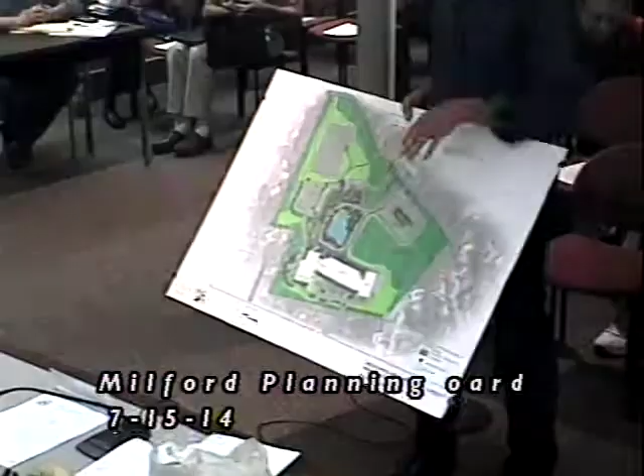In fact, this might be easier to see. This is my landscaping plan, which is very colorful. The school is located down here at the southern end of the site.

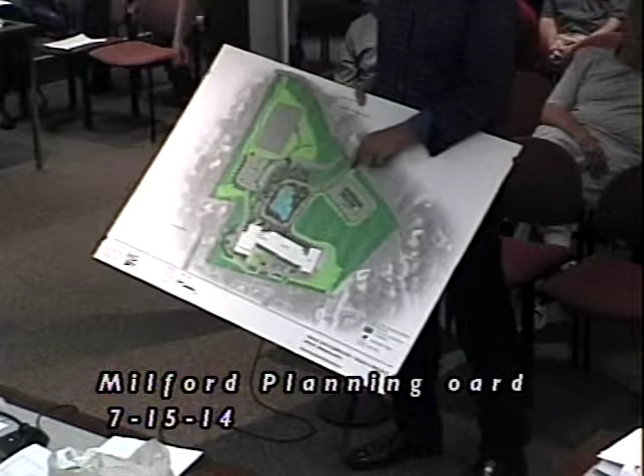North Vine Street runs along the north side. The proposal is to have two entrances, one for parents and service vehicles, a second for bus and accessible parking and staff, in this location. So that's for parents and buses.

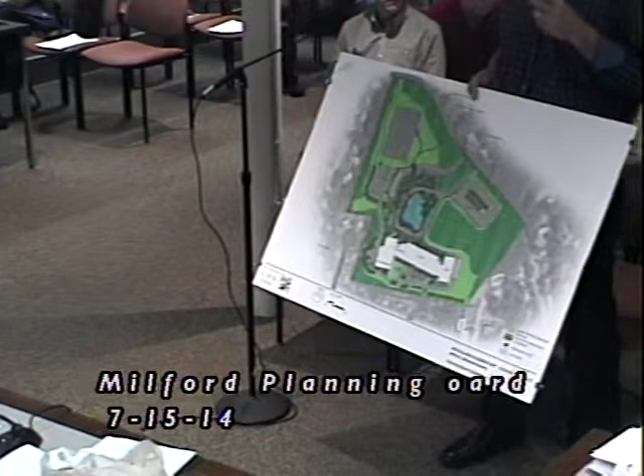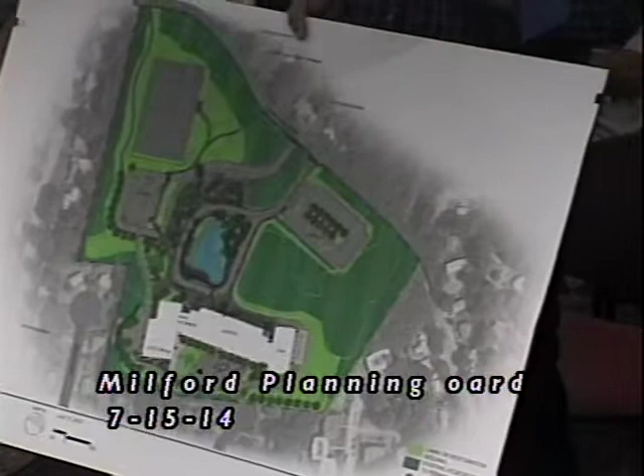The parents loop is one way in, as per recent discussion with the town departments, going to a two-lane configuration after this initial island. The two-lane configuration is sized to accommodate up to 88 vehicles for queuing, so queuing doesn't back up onto North Vine Street. That plus the 53 parking spaces within the parking area here is enough to accommodate all of the pickup and drop off vehicles.

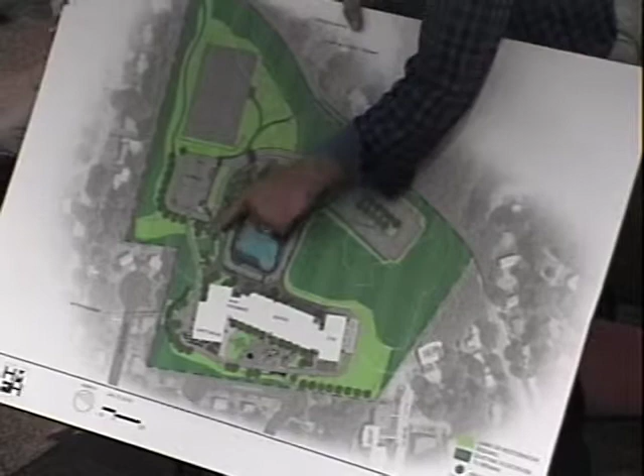Pickup and drop off happens along these three sides of this area, around the outside of the parking area. Students who get out of a vehicle will walk along the sidewalk and then into the front entrance, into the main entrance of the school. Anybody who needs to park can park here, walk across this crosswalk, and then on into the school.

If you're arriving in a bus, the route is along through here. We have 12 buses projected at the school, but we have room for 13, so there's some flexibility in the arrangement of the parking for the buses, which is great news.

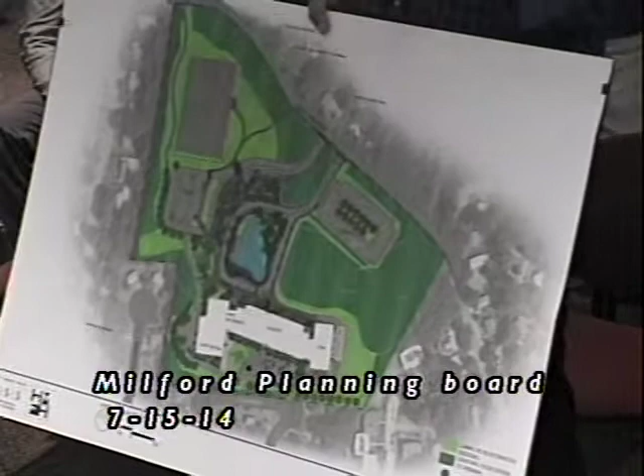In addition to those 13 spaces, we have 2 van accessible spaces along the curbside, so the special needs van can stop and let students on or off at that location. That's directly in front of the school with a flush curb and bollards to protect from cars driving up onto the sidewalk.

Does that make sense? Okay, thank you. The size of the bus loop is determined primarily by the stormwater pond, which exists on the site in the middle here. Nate's going to talk later about how that's being sized to accommodate all the stormwater drainage on the site, so I'm not going to go into that.

In addition, at the bus loop are 7 parking spaces for accessible use. So if you have business at the school and need to park longer term than the short term pickup and drop off, we have 7 parallel parking spaces there, some with right side aisles and some with the required left side aisles. Does that make sense? Okay.

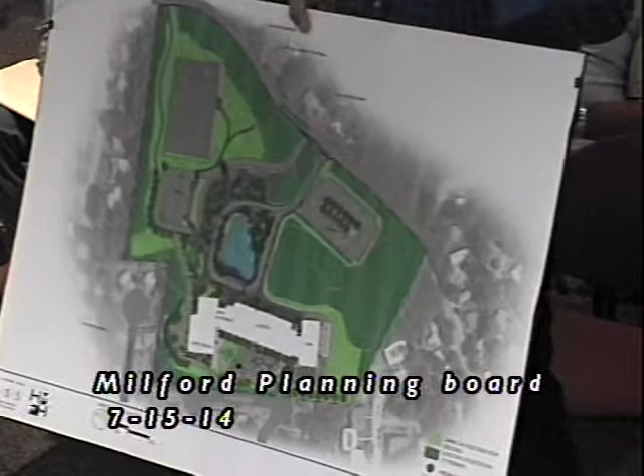133 staff parking spaces are over here on the northeast side of the site. A sign at the entrance will indicate accessible, staff, and bus use only for this loop.

Also off of this loop is the fire access that runs around the entire school and then back out here. That will be a mountable curb at that location. We've run all the auto turn calculations and the Milford trucks can get through.

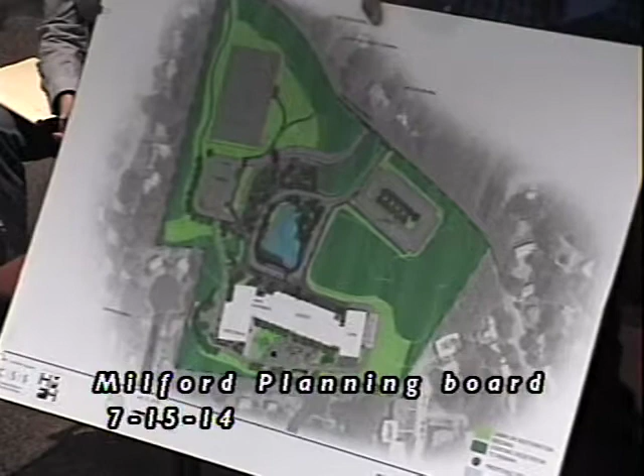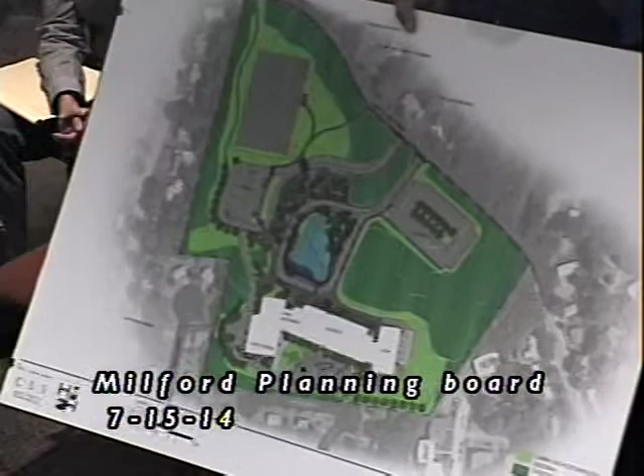Service for the school on a daily basis is through the service entrance here, off of the parent pickup and drop off loop, that goes to the west side by the cafetorium. That's where garbage and the daily deliveries happen. Exiting for the service vehicles would be through a hammerhead arrangement and then back out along that way.

The pedestrian access from North Vine Street has basically 3 access ways. A new path runs from the northwest corner. An existing path is open here today, and we're just extending it through this field, then through a raised crossing across the parent pickup and drop-off route, and down to the school. A third access is along the existing sidewalk from the east that runs south past the staff lot to the school.

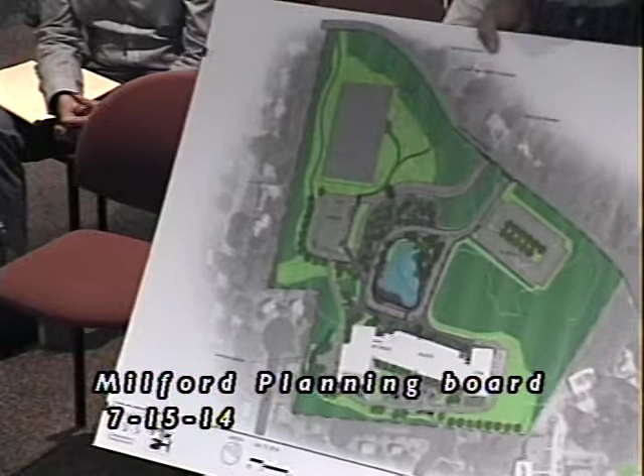This big field up here in the northwest corner is a synthetic soccer field sized for soccer play. We're looking at all of the high school rules, although this is primarily for the school.

It's accessed accessibly from a walk here, and there are 3 accessible parking spaces as close as possible to the soccer field - 2 van accessible and 1 traditional accessible parking space. And this is a traditional crosswalk with curb ramps.

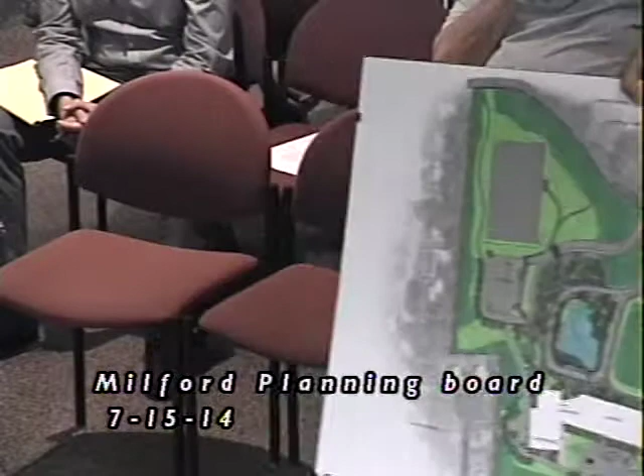There's a 100-foot offset line for school uses within a residential district, and we obey that 100%. The only things that transgress it are walkways and driveways, and then the fire lane as well - required uses.

The last thing to talk about is all the green on this plan. The dark green is existing forest, lighter green is planted space. We are proposing planting quite a few trees. We have the required amount of trees for parking. In general, we're keeping them out of spaces where snow is to be pushed, so in the center aisle here, and then around the perimeter out here.

We basically have 22 trees shown in those 2 locations, and we need 20, so we're right on as far as the tree count. We're trying to preserve a bunch of existing trees. When you drive into the school, there's the circle - we're trying to preserve some of those trees in that circle because they're pretty great trees, and we can do it. It also happens to help some of our wetland requirements.

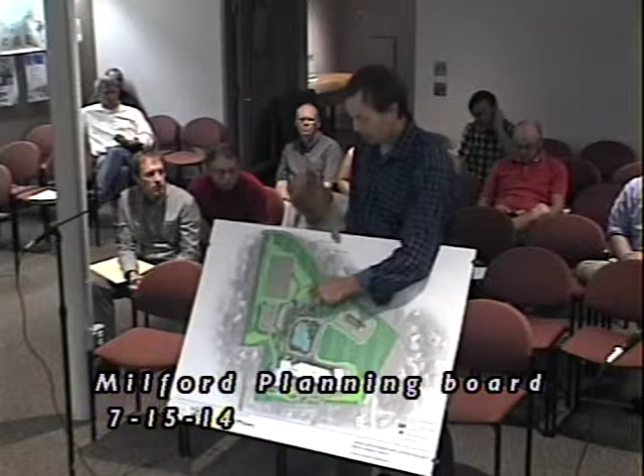The last thing, before I let Nate stand up, is we have a parking lot here that we're calling our bus parking, and that's included as an add alternate. So if the town wants to, in the future, build a parking lot in that space, then they can. Any questions?

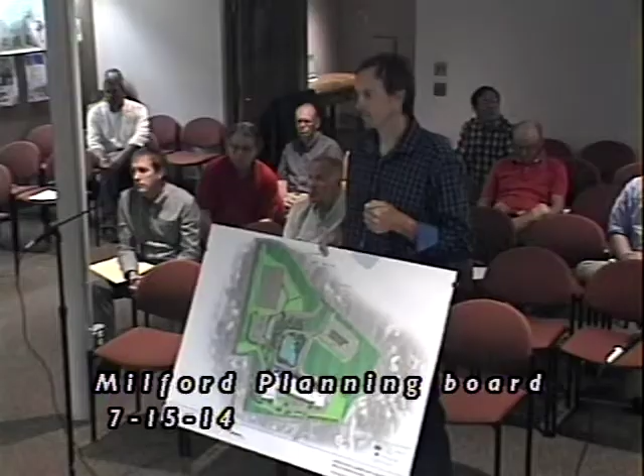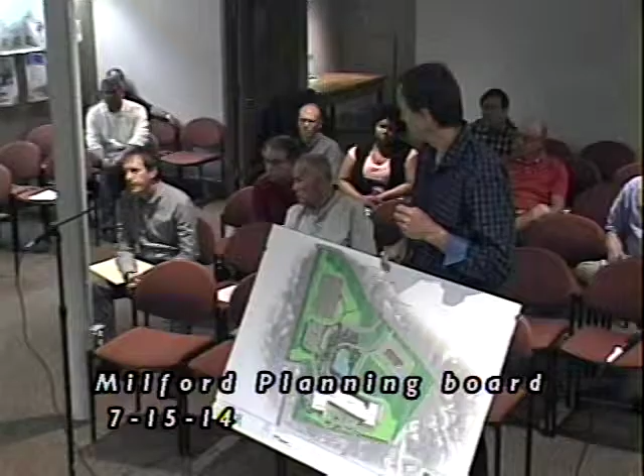Pat, go ahead. No, go ahead - I got a couple questions. In the existing soccer field, where we're going to build a school right now - is there not a rest area, restrooms, and a concession stand? There's a concession stand. Matt, do you know if there are restrooms in it? Yes, it has a toilet. So we have no plans on building them - we have not been asked by the building committee to include concessions.

I mean, it just seems if you had them there, they're necessary. Again, it's going to be a field that's going to be used quite a bit in the school, so it's just something I would think of, but again, it's your committee.

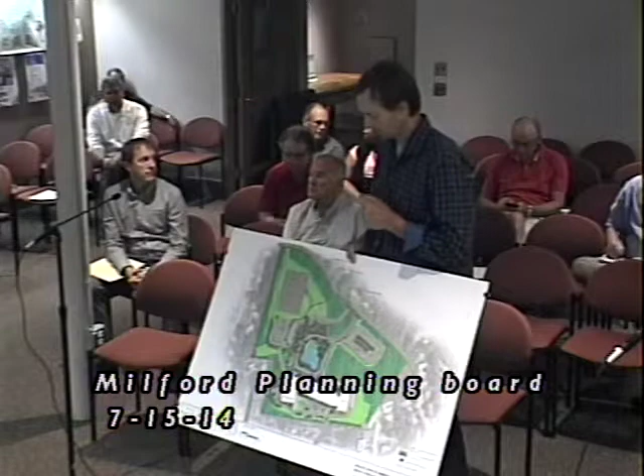The trees along there, down further, right there. Are those new trees? Yes, the dark green are new trees.

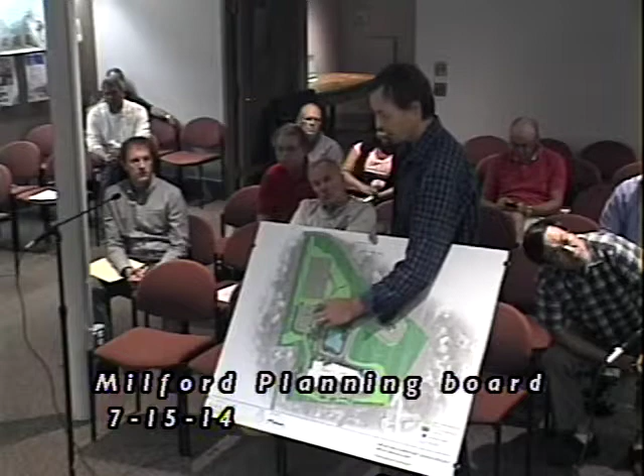Why are they planted so close to the roadway? They should be pushed away to make room for the snow plows to push the snow. What you're doing there is choking the snowplow operators. Let me explain the snowplow operator's position, because we've been working closely with him. He is talking about using the exterior drive to enter this space and plow to the north. That's why there are no trees between the soccer field and the parking lot.

So his thinking is to plow everything out this way. There's approximately 25, or maybe 20 feet — he can't go in that direction anyways because he's got the sidewalk there. The other side doesn't have an active sidewalk, so we can push it north, right over the sidewalk, but we've been very careful to avoid putting any trees in harm's way.

I think Scott had comments on that. Yeah, I did see the comments that Scott had.

Okay, that's all I got right now. Lena? No, I'll wait till everybody else has a chance to speak. Okay, Joe? No, I didn't have anything, I was just looking at Scott's comments. Did you address all of Scott's comments as part of these? Yes, I think so.

Go ahead, where are you located in the handicap parking? There are 7 spaces — 4 here and 3 here — associated with the bus lot, and then 3 over here in the parent pickup and drop off.

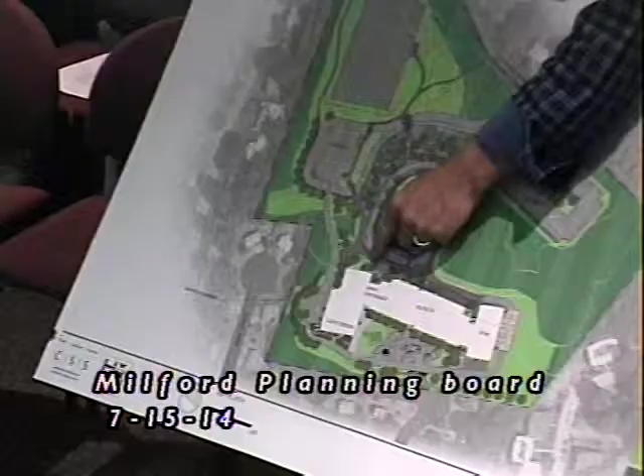Okay, because I got confused — at one point I thought you said that was for short-term parking, but it is handicap, correct? The short-term spaces are right here, and we're not counting those as spaces. That's just temporary pickup and drop off.

Okay, but they are accessible, slightly confusing for a second — in the beginning you said you have signage that restricts it, saying buses and staff, if you will. Buses, staff, and accessible use, which would be handicap, correct? Yes.

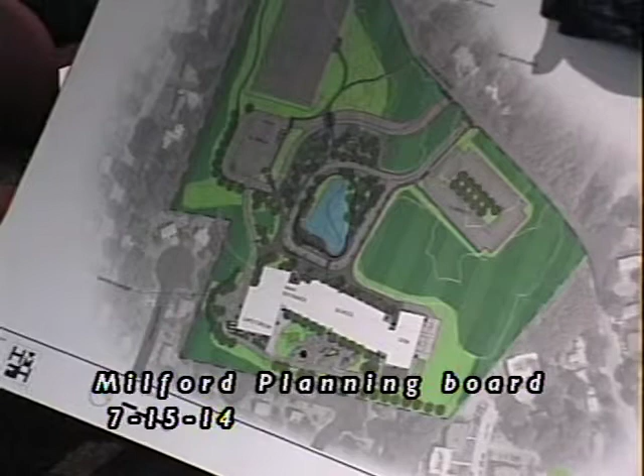If you have 7 and then 3 more, that's 10 — what's the site required to have? 6, I believe. Okay, so why would you need more temporary spots? I'm just confused why you'd need temporary spots.

There was a request to have van spaces for that — when you'd say accessible vans, are we talking about school vans? School vans, okay. So that has nothing to do with — let's not confuse the issue by calling it something other than what it is — it's accessible use, which is going to be part of a school van or school bus.

You let it seem that there's also going to be some sort of permitted short-term parking there, which is not what you're saying. That's right, I'm not saying that. I just wanted to clarify that was all — that was one of my questions. I thought something changed, but okay.

Who's next then? I'm good. You're good?

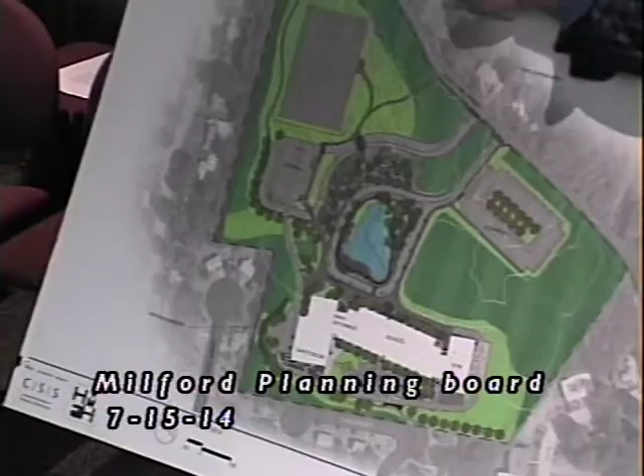Can I ask you questions? Yes. Well, I don't know — speak to the chairman, please. All right, not yet.

Good evening, everyone. I'm Nathan Ketchell, with Garcia, Gluskin, D'Souza, the civil engineers on the project. I'm going to give you a brief overview of the utilities involved with the site.

Obviously, the biggest one is the storm drainage on the site. The existing site does have a series of deep sump catch basins, which are directed to an underground drainage network, then piped to the existing detention pond, just southeast of the existing school building. In addition, there's a swale that runs behind the existing school around the parking lot and then also into that pond.

Under the proposed conditions, we're going to be utilizing a series of deep sump catch basins, followed by an underground piped drainage network, which will be sent to a hydrodynamic stormwater separator for total suspended solids treatment of the runoff. The runoff will then discharge to an enlarged detention pond located at the location of the existing one, with a piped overflow that will run to the east around the new building and then connect to the existing municipal drainage system, as the existing pond had done.

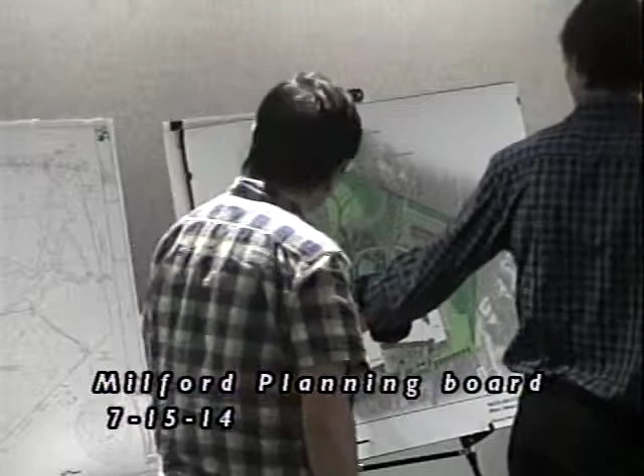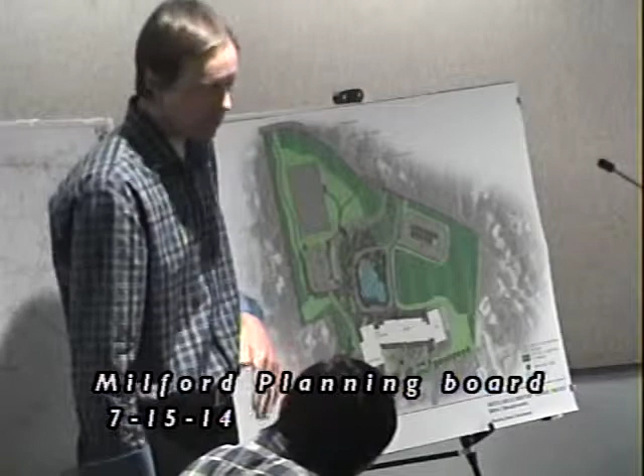Right, that's a good question. This did change subsequent to our last presentation because there's a wetland here, and in order to avoid damaging this wetland, we were able to relocate that roadway to just to the west. So that avoids about 2,300 square feet of wetland replication that we're going to avoid.

So it's a big deal. It's a big deal for my house, because this is my house here. Yes, so that's why you don't have to cut up many trees. I can also explain something about that.

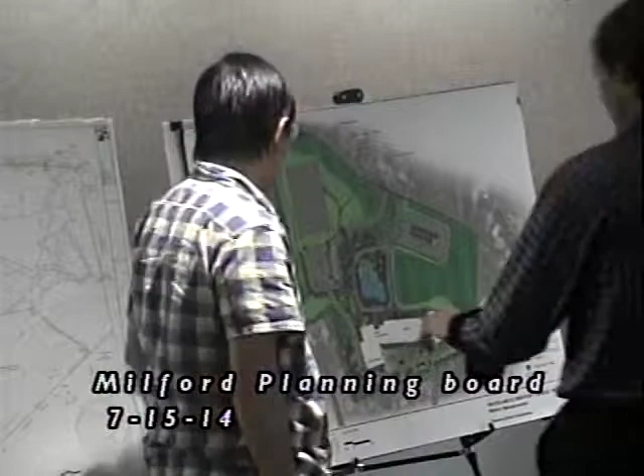The existing parking lot that is here is going to be taken out and just planted over. Okay, so you will get more vegetation on this side. There is an existing pathway that runs through here.

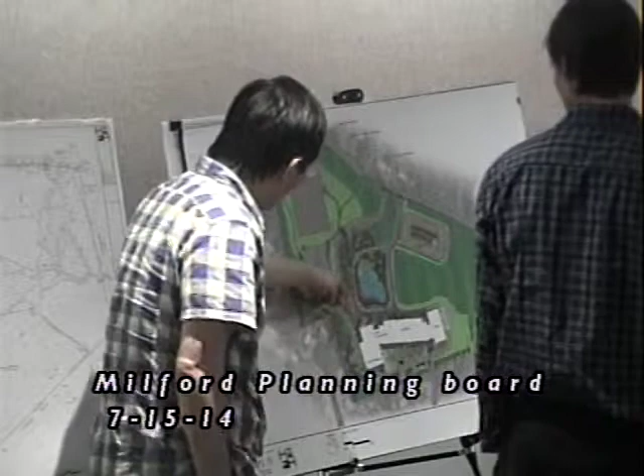Right, that pathway here is around here. So that's existing, but you move here, about very close to the boundary. All right, yeah, you will lose some trees there.

Okay, this is not a public hearing, but we will take some comments first from the commission. Harold Rhodes, 11 Janet Road, Commission on Disability. Mr. Chairman, we submitted some comments with regard to this site plan, and I'm wondering if the engineers can review the specific comments that we made.

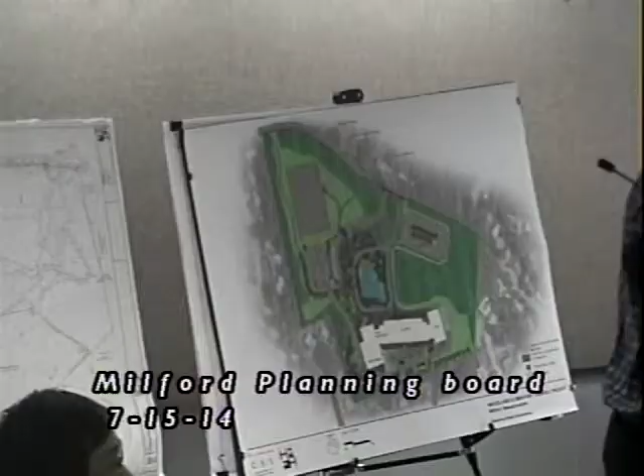You haven't gotten that? Those comments are here, they're simple comments. Have the comments— we've been— done that. Yes, the comments have been incorporated. He explained that when he did the presentation. Well, I couldn't quite see when it was being presented, but—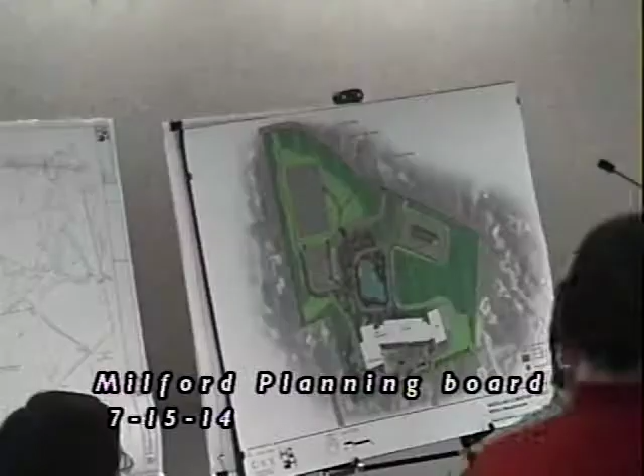Am I understanding still that the parking in front of the school will still be on the other side of the street? Yes. And the parking along the other side of the retaining pond, if you could just point to it—there's going to be handicap parking there? Yes, there are 7 spaces there, and how many along the—well, there are 3 and 4. So 7 total.

This is a chance for us to avoid, over the next 30 years, someone being hit inadvertently by a truck, by a bus. I had a long discussion about this topic with the superintendent, and he certainly understands and agrees with this point.

I am very worried that over the next 30 years, there will be a family exiting the van along that side into that street, and there will be a bus come and strike the child. And that is our concern.

Can I just ask, where would you prefer the handicap parking to be? We suggested that the parking, as it is at other locations, should be on the side directly accessible to the school. When a van exits, the bus ramp is a bus loop, and unfortunately, the side that opens is opposite of what we'd expect.

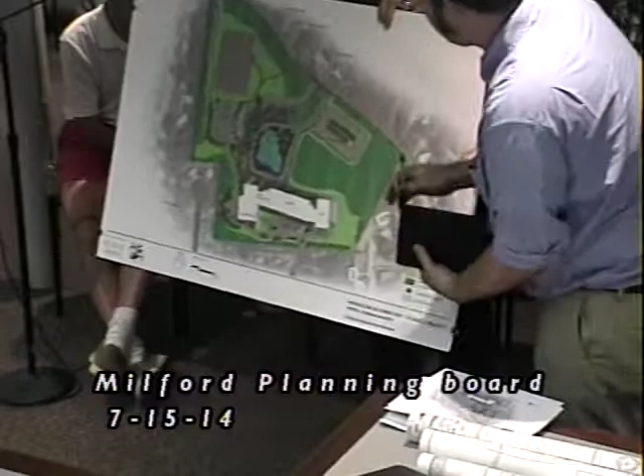Come to this one, it's a little easier for me to see, if you don't mind. Is this close enough? Because this one's in color, it's a little easier. He's Irish, he likes the green.

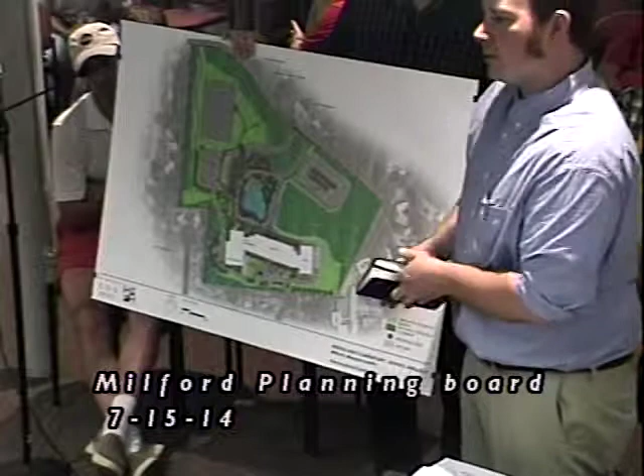As part of our drainage calculations, we did include this area associated with the future parking lot as impervious. We modeled it and will actually provide a catch basin, which will be installed under a base contract in the southwest corner of that lot. So the expectation is that the runoff will come down and be intercepted at that location. Okay, so it's already built in and already calculated. Yes, and we own the...

One other question - Babe had referenced restrooms. I guess the question is, is there any interest in putting in perhaps a concrete pad? Because I think more and more have been favoring the porta toilets, since they're only an interim type of thing, and I know Joe had mentioned provisions for that, and lighting too.

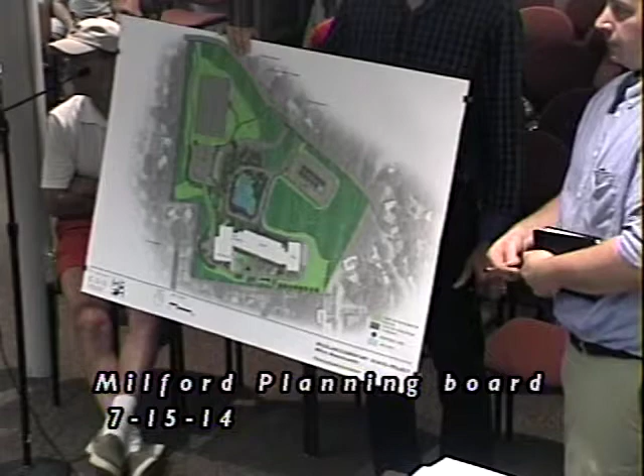To be honest, I think it's up to them, but my feeling is that for approval, we need to have provisions for restroom facilities at that field, be it porta toilets or if they want to put in a building. A concession stand, I think, is totally up to them - I wouldn't say yes or no, that's subjective - but I believe that to make that field useful, we should have restroom facilities at that location.

How that's done, I would leave up to them, but there's nothing shown as of right now, and I wouldn't be in favor of it the way it is.

The provisions for lighting, we didn't really think it was incumbent upon the school building to get involved with that, and that's why we stayed away from it. But to make provisions, I'm not fazed one way or the other. I look at this as the school's building, but also the town's building, and I look at the people of the town that are going to use it. To make full use of that, at a minimum, it should have the electrical put in, but I fully believe it should be lit.

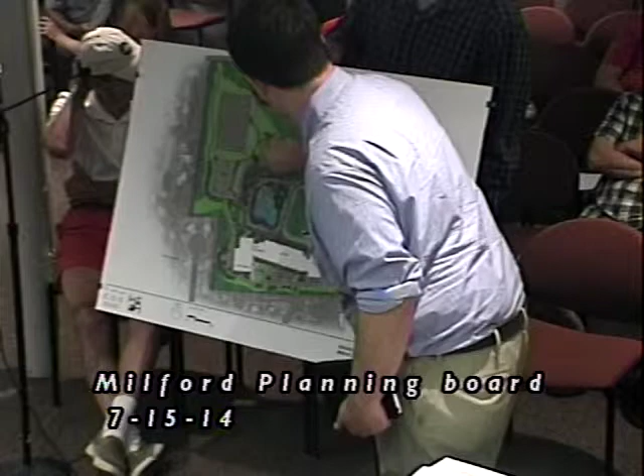Question, the existing sewer from the existing school, where is it? That is located up on the northeast side of the existing building, right by it. I believe it runs right through this area here, under an existing walkway.

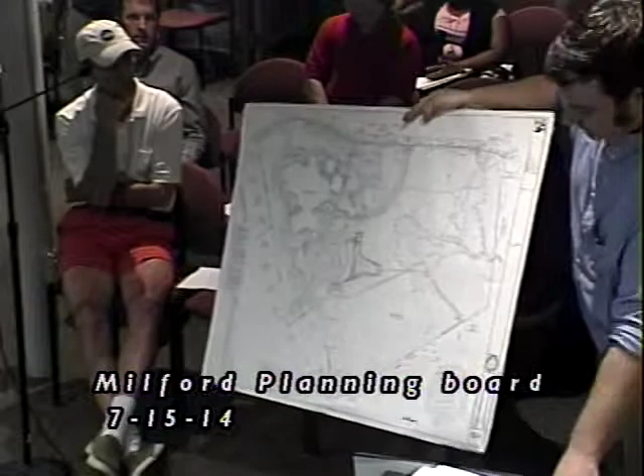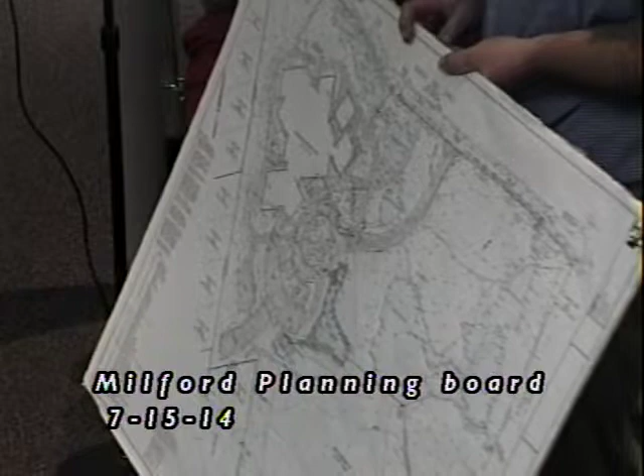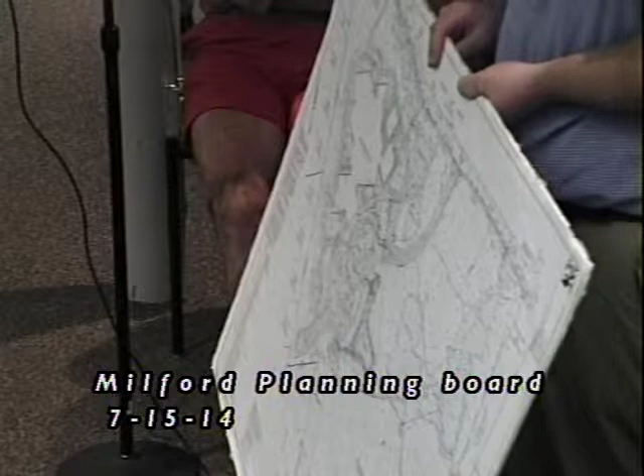You'll have to cap the existing sewer anyway. Correct, and you should have a water service tapped off and brought to approximately the same area. Then in the future, if there was need for restrooms, you'd have it there without tearing everything up. It's already there now, so that's going to be done.

Also, if you just put a pad and put porta potties there - again, I'm not speaking for the Parks Department, but ultimately the Parks Department is the one who maintains the property, and this gets into multi-departments. It appears more and more they've been going to porta toilets than using facilities. I understand, but you've got the facilities there for it - you want to run it, go ahead and run it. They're underground, if you don't use them, they're not hurting anything.

One thing I didn't fail to mention - he's not finished - one thing I didn't mention is that as part of the project, we are providing a drinking fountain up at the turf field, so I could discuss with our plumbing engineers the feasibility of increasing the size of that line and providing a cap up in that area for a potential future use.

Okay, Mr. Chairman, I'm a member of the consultant team. I'm with the owner's project manager, Justin Lesser. My name is David - oops, Chris, sorry.

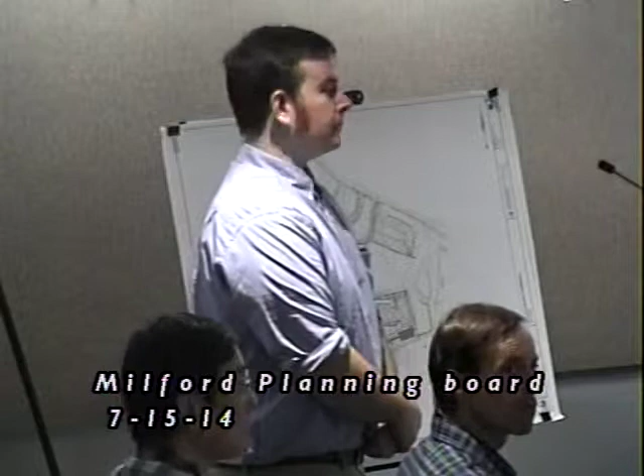So just to get back to these questions about lighting and restroom facilities and so forth, just for the record, as you know this project is a partnership with the Massachusetts School Building Authority, and they govern to some degree the scope and the budget and what we can spend money on. The MSBA has a sort of mantra that says, we're building schools, not athletic facilities. They have already said they will not participate in the cost of the turf field beyond grass. We as a project team think turf is wise for the town, you'll get much more use out of it, but they will not participate. Lighting the field, they will not participate. And if we do add that scope, it will come at the expense of school program. We are on a finite budget, and at the moment we believe that the budget and the scope are directly aligned.

I would estimate from the Uxbridge High School project, which I manage, that the lighting of a field of that nature would be in the neighborhood of $250,000 to $300,000, and that would come directly out of some other school program. I may not be perfect in that number, but that was the number we used for Uxbridge - it can't be too far off. Running empty conduit is still a fairly considerable cost for the potential future lighting stanchions, although it's certainly less than the light poles, the wire in them, the transformer, and everything that goes with it.

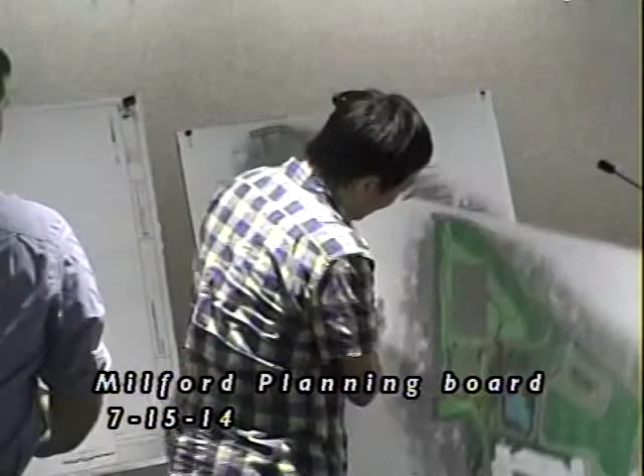Yes, sir. So, I'm just thinking about the design - what's the traffic flow from this side going to this, right? That's an access road, sir. Yeah, this one. No, the one you keep pointing to is nothing more than an access road - the one that's gonna be by your house is nothing more than an access road, for deliveries. So this access immediately goes to the cafeteria, then the truck goes back to this road, right? Just a delivery truck - they come here, then go back from here.

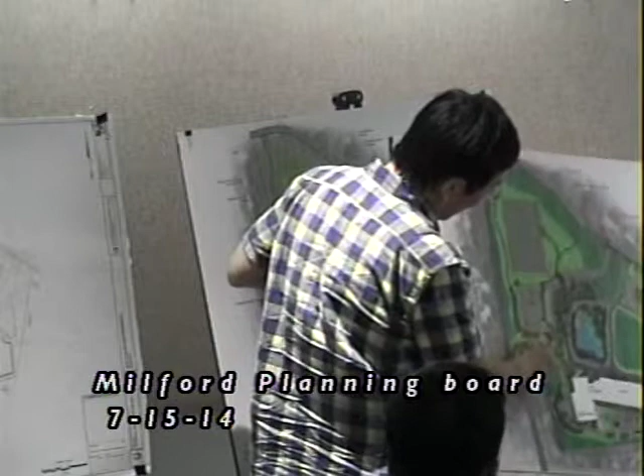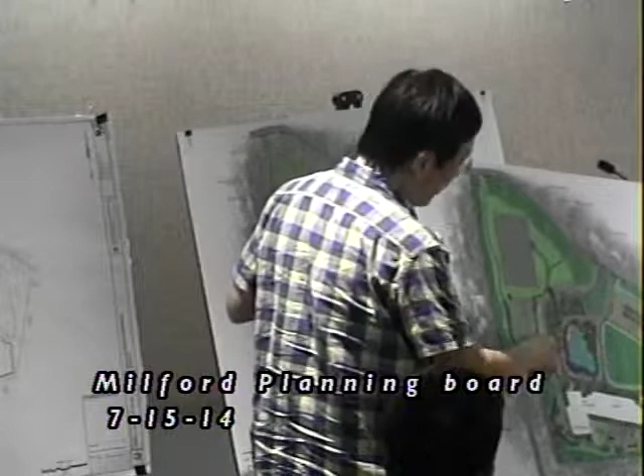I studied civil engineering for many years.

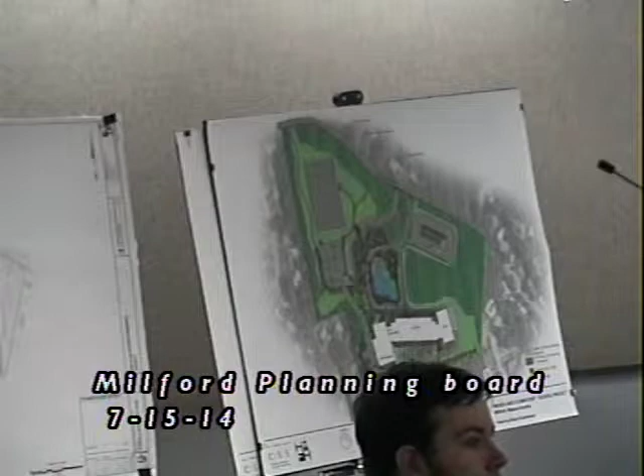Yes, Mr. Chairman, I've just discussed it with the Vice Chair and our architect. We will bring back to our board on the 30th the recommendation that conduits go on either side of the playing field, and that we provide access to water at that particular facility. And while we're doing the water, we'll put a drain pipe in for whatever kind of storage. Now, we're not going to get involved in lights, we're not going to get involved in any of that because we're building the school. At some point in time, if it's decided that lights or facilities need to go in, the infrastructure will be available, but it will be up to someone else to do that. As far as the building committee is concerned, we will take Mr. Calagioni's suggestion to heart and run the conduit, and leave it to others down the road, however many years down the road that may be.

This was our intent anyway, not to tell the school building committee how to build a school or what to build. We just want to take advantage of what we have for utilities there. We understand that, Mr. Chairman. Basically, what we'd like to do is just move this project along so we don't have to delay what we're doing, but so long as we understand our primary job is to build a school. The field is there, but we will certainly take that advice and install the conduits.